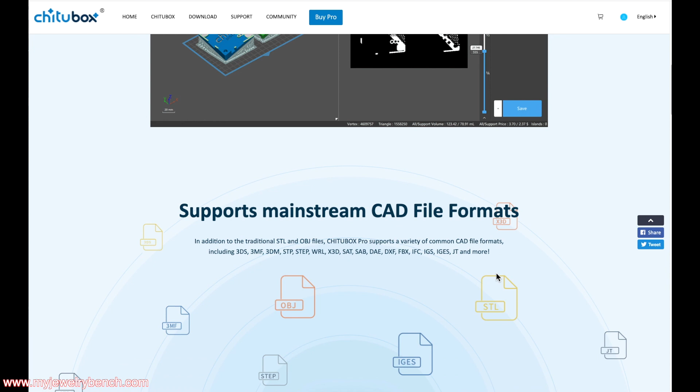I'm going to go over Chitubox Pro's features, not all of them, but most of them, and I'll talk a little bit about my thoughts and opinions. While they did offer this product to me for free, I want to give you my honest and best opinion of whether or not it is worth the $169 I believe at the current cost per year for a subscription.

I'm not a big fan of subscriptions, but some people like them because you always get the latest versions and it doesn't cost you a whole lot. I'm not going to do a comparison against Chitubox Basic or Free, but we'll do a little bit of comparing, because most of us, unless you've lived under a rock, if you have a resin 3D printer, you're probably using Chitubox Basic or Chitubox Free.

The current version of Chitubox Pro is available for Windows 10. It is not yet available for Macintosh or Linux. I believe the Macintosh version, from what I was told, is coming out closer towards the end of this month, which is really great because that's what I would work on. I happen to like modeling on a Macintosh better than a Windows PC, so if you're waiting for that, you don't have to wait very long.

Now I'm going to dive into the Chitubox Pro application and let you know my thoughts and show you around, and you can determine whether or not it's going to work for you. Let's get started.

When you first open the program, what you're going to see is this window here, and this is the main form screen of the Chitubox Pro application. What you'll notice is that it's now set up more like an Office Suite application, where you have tabs at the top with the corresponding functions just below those tabs. We have Start, Prepare, Support, Analyze and Measure, Settings, and Help.

Along the left side, you'll notice we have all the same buttons with the exception of Select, which has been added. But we can move our object, rotate it, scale, and mirror our object on the left, just like we did in the basic version.

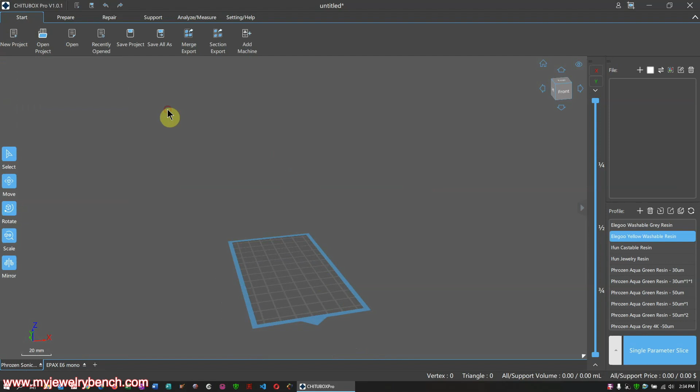You could save all as, so if you have multiple items on your build plate, you can go ahead and save all those. You can merge exports by combining all of those objects on your build plate into one 3D object. You have section export, so let's say you have 10 items but only 5 selected, you can export those. And then, of course, add machine.

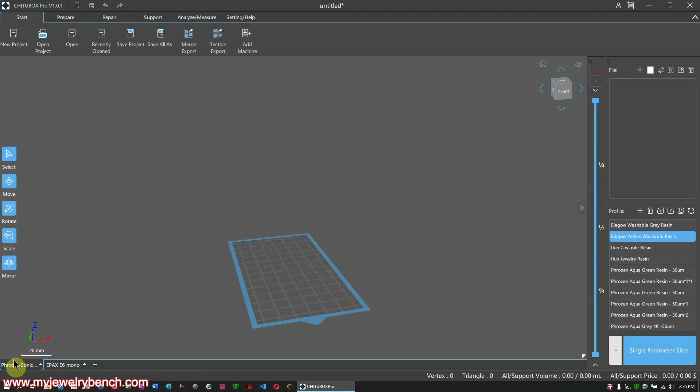There are 2 places to add a machine, here at the top and again at the bottom. So I'm going to go ahead and show you how to add a machine. Let me pause the video right here and just talk a little bit about adding your machine.

Some of the older versions of printers that we may have may not be compatible. I have a relatively newly upgraded printer, an Epax printer, that unfortunately is not compatible currently with Chitubox Pro. So I'm going to have to continue using the basic version until it is compatible at some point in time, or until they come up with a firmware update.

So before you decide to purchase Chitubox Pro, double check and make sure that the firmware of your printer is either compatible with the Chitubox Pro application, or that there is a firmware update for you to install on your printer.

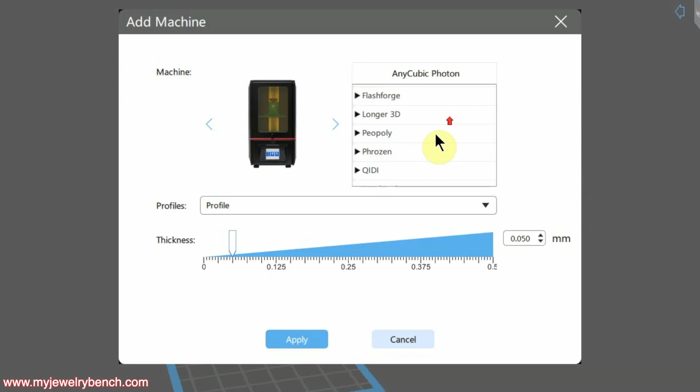Chitubox Pro does make it very easy to add in a printer. You just hit the Add Machine button and select the manufacturer. Not every printer here is compatible with Chitubox Pro, so just take note of that.

I have an Epax printer, an X1K 2K mono or monochrome, so I'm going to add that. We'll just select that printer there.

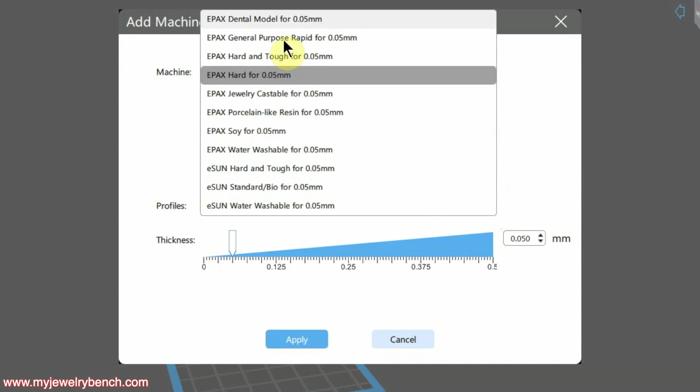We also have the standard size of the layer height we want, and we can also get a default resin that we want to use. So for instance, if you typically print in one kind of resin, you can make that your default resin. I'm going to select the general purpose resin here, and then we're going to move on to the thickness of the layer height, which you can see I can adjust next.

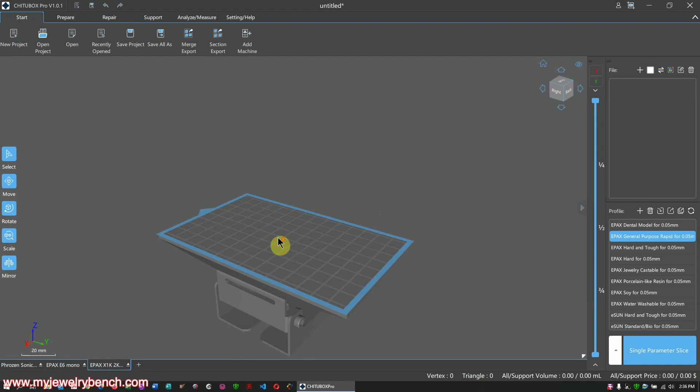One of the other things I like about Chitubox Pro is that all your printers, if you have multiple printers, are listed here at the bottom. Anytime I click on a specific printer, all the corresponding resins will show up here on the right-hand side. I can select whatever resin I want to print with, and as long as I've made my adjustments, when I go to slice my model, I don't have to open up a new window tab and go ahead from there.

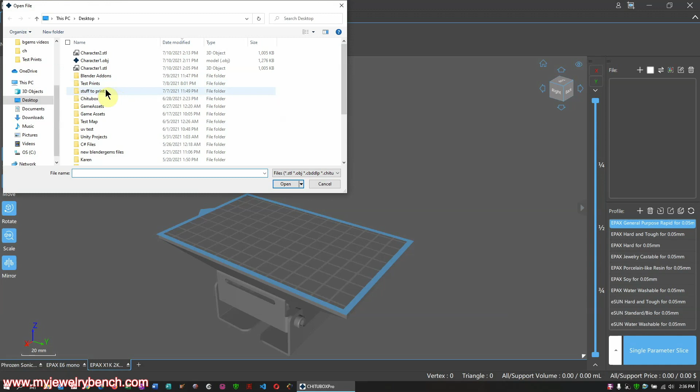I'm just going to import a model here, and when you import a model, if there's anything Chitubox finds that it thinks is wrong with it, it's going to bring up this dialog box telling you that it needs to be repaired. You have the option of pressing yes to automatically repair it or cancel to cancel the repair and then go on to the modeling or the 3D printing setup.

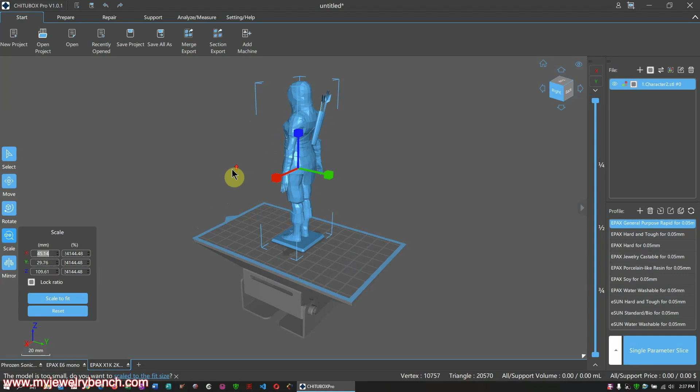Here you can see I brought in my model. I've scaled it up a little bit because this came in a little bit small. I was trying to do a low poly model here just to see how I would go about doing the support systems for this, so I'm going to just tweak the settings here for the scale.

Just like you did in Chitubox Basic, you have the constraints for the print size of your particular printer. So if your model scale is too large for your printer, you will see the parts that won't get printed or that are off the build plate and build size show up as red, and anything that can be printed will show up as blue.

You can go ahead and change these, and I'll cover the color settings under the settings tab later. For the most part, the tabs at the top of Chitubox Pro are set up in kind of an order that you'd be using them.

Start, prepare, repair, support, things like that. Now, the repair, I would probably put that second, because if you're going to have a model problem, you're going to want to do that first.

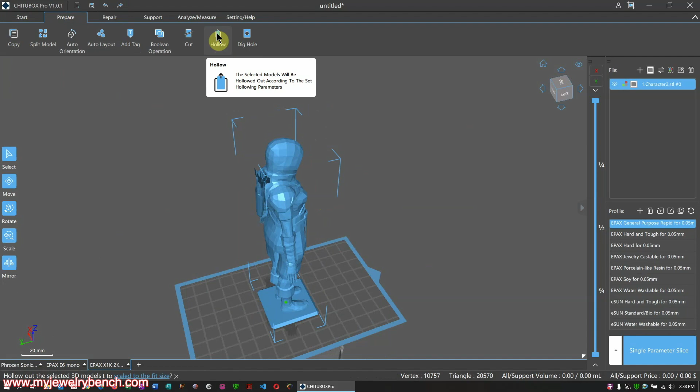But in this case, I went over to the prepare tab, and we're going to bring up the hollow option. You can see that the hollow option has a little more detail, a few more controls than we had from the basic version. This allows us to make a few more changes, although very similar to what we had before.

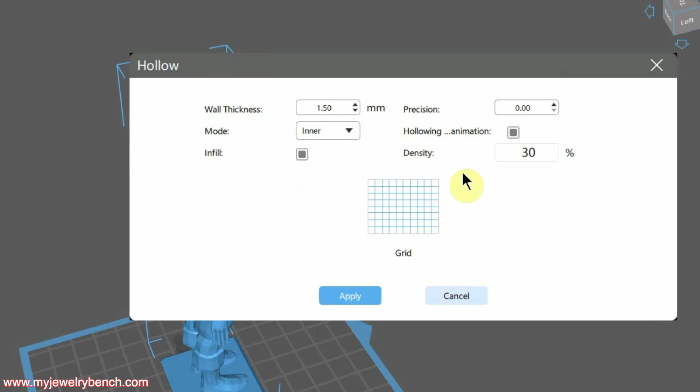We can adjust our size of the wall thickness for hollowing, whether or not we want to watch the animation, which sometimes is cool but not necessary. If we want to do infill, the support or how we want our infill to look, the density as a percentage of printing, and then we can apply that or cancel and move on to the next step.

So if we want to hollow it out, we just hit that hollow button and it'll run through its animation and hollow the model out for us.

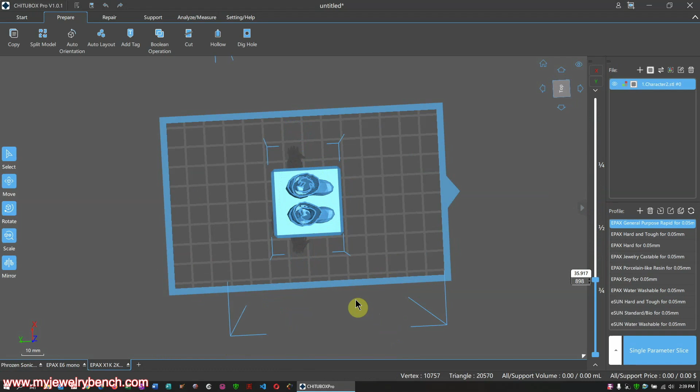Of course, once you've hollowed out your model, you're going to have to drill out a hole. So find the place where you want to put the hole for the resin to come out of, and make sure that hole is big enough. I don't think I made it very big when I made the hole for this particular model, and I probably wouldn't have put it in the top of the head if I was going to print this, but I went through and did it anyway just to do a test.

Again, Chitubox, when you dig out a hole into your model, will bring up a dialog box. So you just click that, and it'll bring up a dialog box to allow us to make adjustments.

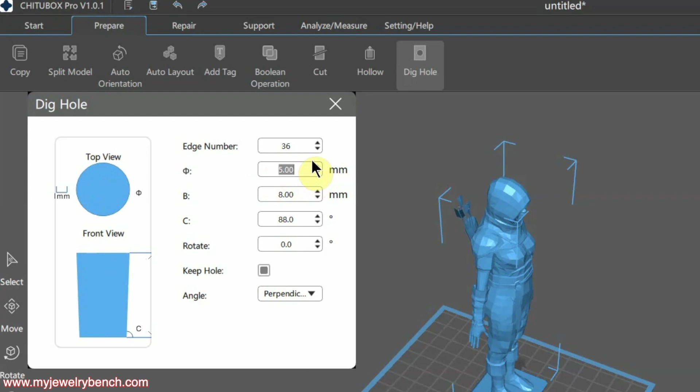Now, I really like the fact that everything is kind of graphical in Chitubox Pro, so that if you're new to 3D printing, or even if you just want to quickly look at things, you can see things at a glance and it gives you the corresponding reference. I can see the edge numbers, make my hole a little more detailed, and little indicators point to which settings I'm changing. There's no guesswork, you're seeing it here. As I make changes to the numbers, it makes the changes on the diagram to the left.

You can put your hole somewhere on your model, and it'll follow the surface of whatever area you're working on, which is really convenient. Once you find that place, you just click and it'll put the hole on your build plate, or the plug for that hole, and it'll hollow or put a little hole wherever you select it.

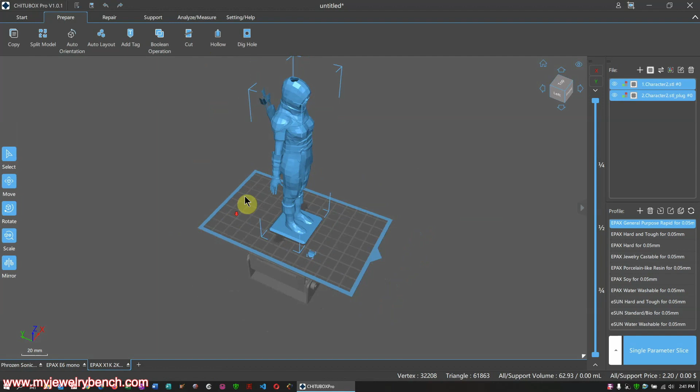Another really nice new thing in Chitubox Pro is the add tag option. Add tag is a convenient way for you to add either an indented text line or an extruded text line to any particular model that you want. You can put it anywhere you'd like, like in this case along the base. I could add it to my model. However, just keep in mind that unfortunately we have no control over the text once we add it.

It's only added parallel to the screen, it doesn't rotate around with your model. So if you wanted to orient it in a specific way, you actually have to rotate the model to get the text to show up in the correct orientation.

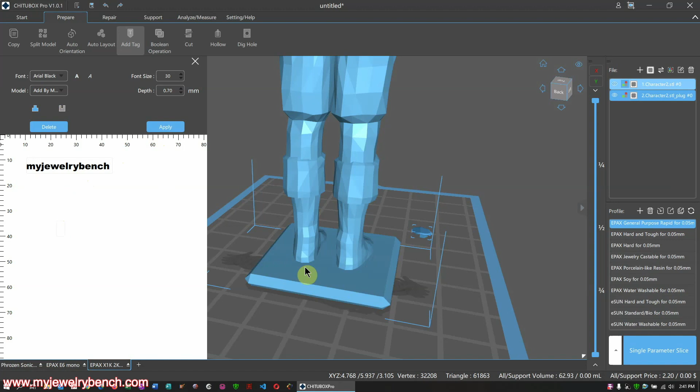It was a little cumbersome to get used to, but once you do that, you just type in the verbiage you want, add in the font you're going to use, the model you're going to be adding it to, the size of the font, and the depth of either the indentation or the extrusion.

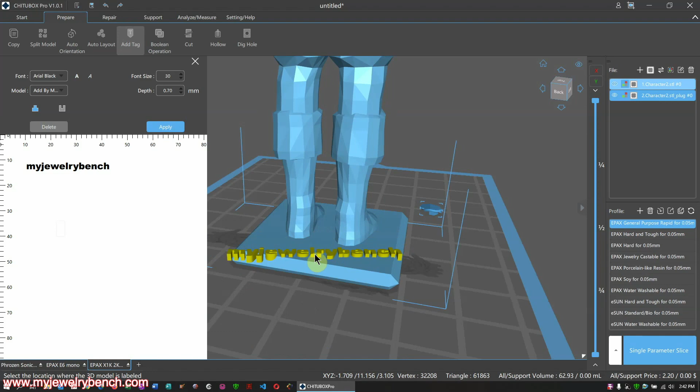Once that's done, hit apply and you can bring that over to your model. Again, if you look closely, it's oriented parallel to the screen and not the model. So if you wanted to rotate that, you actually have to rotate your model to fit the text. That's a little awkward, I'd like to see that change, but for now, that's pretty cool.

If you want to mark certain things like your website information or maybe a model number that you didn't do in design work, you could go ahead and edit here. Or let's say you're printing 5 copies of the same thing, and each of those are going to be for different purposes, or you want to serialize them, you can put little numbers on them to indicate which versions they're for.

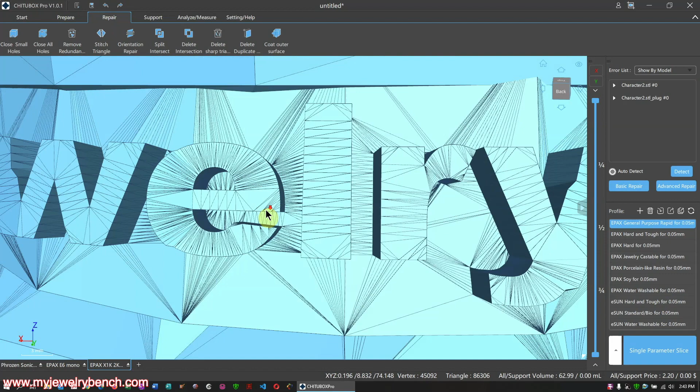So if you ever made a model and it had an error in it that you couldn't figure out when you brought it into Chitubox Basic, we now have a few more repair options built into Chitubox Pro. These are a little more detailed, a lot more mathematically exclusive to actually repairing the model.

For instance, we can close holes, we can close all holes, we can do stitching now, we can make changes to the orientation of each repair. We can delete duplicate faces and intersections.

That's all possible here. I think most of us would rather handle that in modeling, but you do have some of these features here, and the rudimentary repair options may help some of us fix models that we either download off the internet or that we just didn't see errors in when designing. So keep that in mind, play with those as you see fit.

I did have about a 60-40% success ratio on repairing models. In some cases, it kind of just messed up the orientation of the faces. In other cases, it worked really great. So it depends on whatever you're printing in your model.

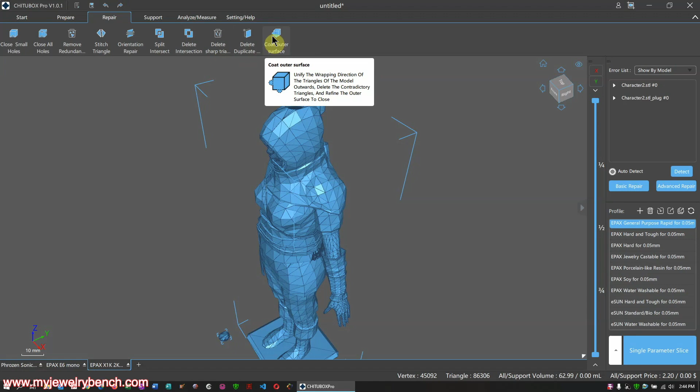Okay, the next step would be to move over to the support tab. Now, the support tab is for your structural lattice work support for 3D printing, not technical support, that's handled in a different area, we'll get to that. So when you click on that tab, it's going to analyze your model and bring up the settings for all your support. On the left, you can see we have some new options that we didn't have in Chitubox Basic.

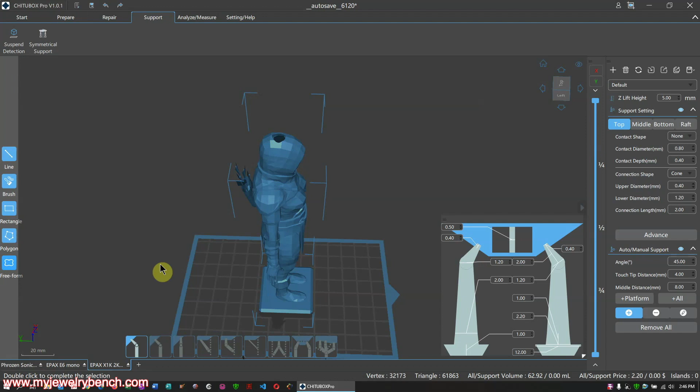On the right, you can see there's a bunch of settings we were used to a little bit with Chitubox Basic, but they've been expanded to cover other areas. On the left, you have little shapes that you can select and circle around your model, allowing you to add structural support to your printing. Or if you like to do custom support work and add your own supports individually, you have that option too, with a lot more flexibility.

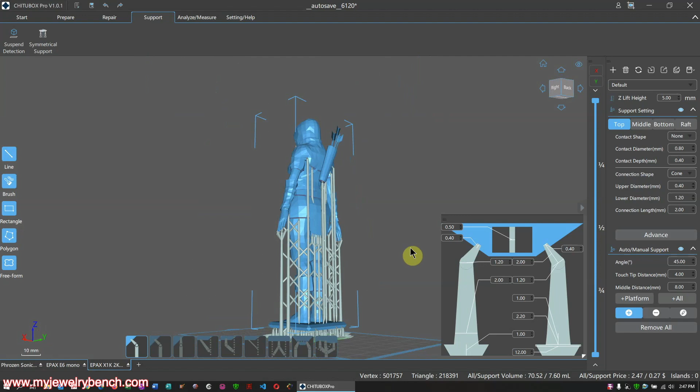Kudos to the development team at Chitubox—let me pause here and talk about a few things. Let's take a quick look at the options at the bottom of the screen. There are 9 options that give us different versions of supports that we can use. I think that's fantastic.

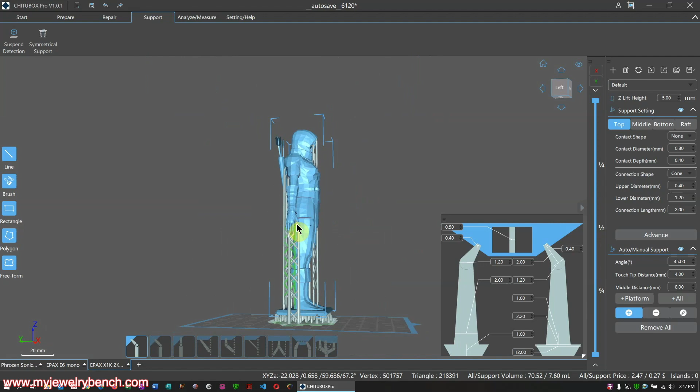If you want to change the way you connect your support materials to and from support structures or lattice work directly onto your model, this gives you default angles to play with, and I think that's fantastic. With this version, I started using the one on the right, which is a tree structure for jewelry printing. If you're doing a lot of 3D printed jewelry or smaller models, that came in handy, and I fell in love with that option.

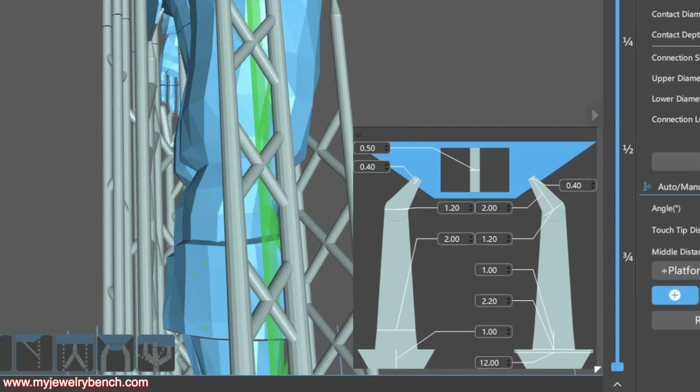The other thing I love about the support setup page is this new window on the right side of the viewport, which gives us the option to adjust any of the particular sizes on our model and how these support structures—the size and depth of the supports—go into and exit our model.

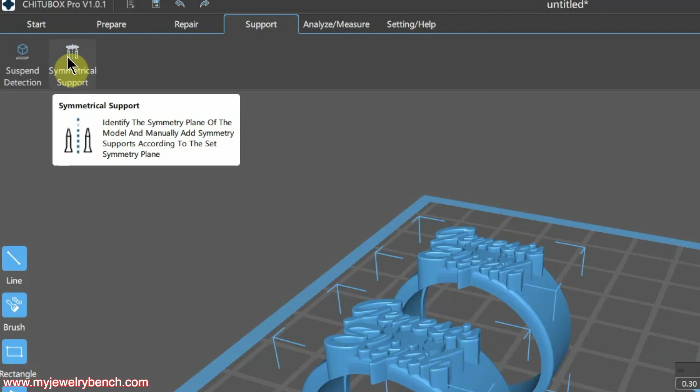I'm also going to jump to another thing I found absolutely fantastic: the ability to symmetrize the supports. If you click this button, you can symmetrize your supports. It brings up a little window asking where you want to symmetrize it along the x-axis.

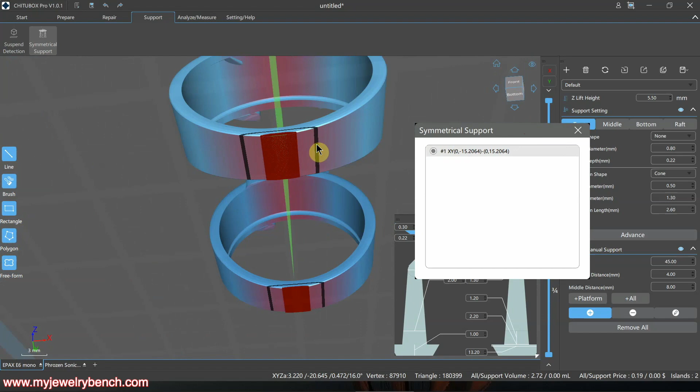What's really fantastic is that when you add your supports, it adds them to both sides of your model. One thing I hated about manually adding supports in Chitubox Basic was trying to get my supports in the same location on either side. Here you can see I had a little issue because the depth of the model was too low, but if I add my supports on one side, it duplicates them on the other. I think that's just fantastic—thank you, Chitubox, for adding that.

Here's another kudo for Chitubox. I think it's important that we have a graphical user interface for our support settings, sizes, and structure. That's something a lot of people don't understand—it takes a lot of work to do this from a software development standpoint, but doing it makes it much easier for the user to want to use your software.

Here you can see this beautiful display showing how deep our model supports are going to break into our model, how wide they may contact, the thickness of each support, and the size of the rafts we're going to use. You can make changes to each and every step of your model.

For instance, if we look here, we can adjust the contact, and you can see I'm spreading that contact out. By making that bigger, in the jewelry industry for example, we could actually make a sprue out of that to get to an area where we possibly couldn't add one for casting.

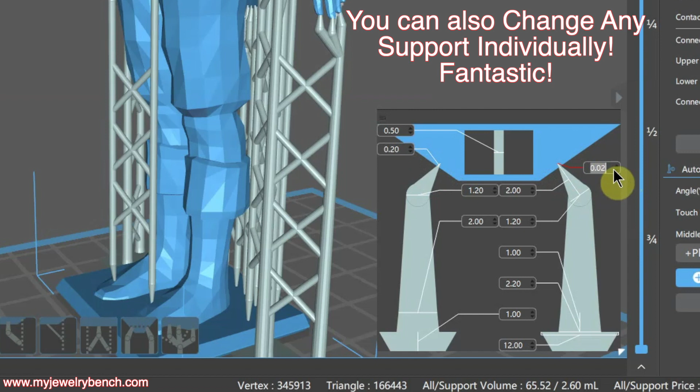It's really nice—we have very fine control. We can go down to 0.02 millimeters, but that's too little. It might be good if you're using a tree structure on a 3D styled character model, maybe just trying to get a finger support there. But for the most part, you're going to stick around 0.2 to 0.3 millimeters in size, and you can adjust your depth according to your model. This is a fantastic tool to use if you really want to customize your model supports.

To be honest, this is where I spent most of my time working with Chitubox Pro. I really enjoyed this part of the software because, like I said, I do a lot of jewelry design, and I have to make a lot of custom supports. I can't rely on just generic settings to add supports to my model, as it may corrupt the model or damage the 3D printed model when I try to remove those supports before I can go into casting. These are things you need to be aware of when working with Chitubox or any slicer, but I think Chitubox Pro is making this a whole lot easier.

Just because I was really impressed, I'm going to cover a little bit more about these. We have these 9 settings for our support structures, and this allows you to build how you'd like your lattice work to show up. I think this itself was just a godsend to add. This helps people who do character models, prototypes, or in my case jewelry, or anything you want 3D printed. This is going to help a lot.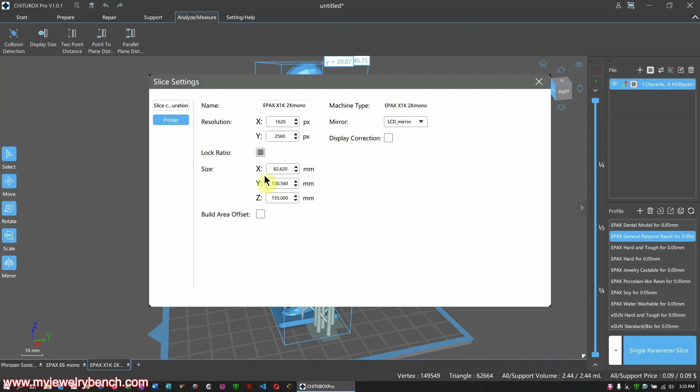We can also go take a look at the next setting, the default slicer settings. Here you can see what we used to have on our setup or settings tab. Now we have resin, print, G-code, and advanced. These are very similar to what we used to have in Chitubox Pro, or what we still have in Chitubox Basic. We still have those in the basic version, but we have a few more options here under the print settings, and you can go in and really make changes to each of your resins based on the specific printing you're doing.

All of these settings are probably a little overwhelming for most people, but it's always a good idea to have a basic understanding of at least the first column, which is your layer height, your bottom layer count, the exposure time, the bottom layer exposure time, and so on. I often suggest people set the light delay or light-off delay for at least 1 or 2 seconds, just because that helps keep your display from overheating.

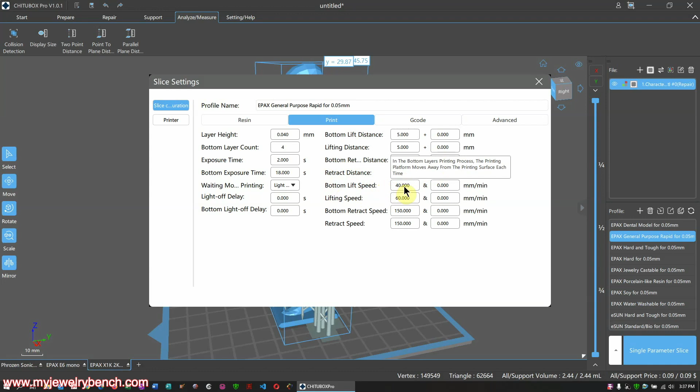Of course, if you're upgrading from Chitubox Basic or the Chitubox Free version and you're going to buy the Pro version subscription, you can import all of the resin settings into your current printer settings. So for instance, if I go to Chitubox Basic, I can export all my resin files that I've created and modified for the resins I use, and import them into Chitubox Pro, specifically for the printer I have set up in the tab.

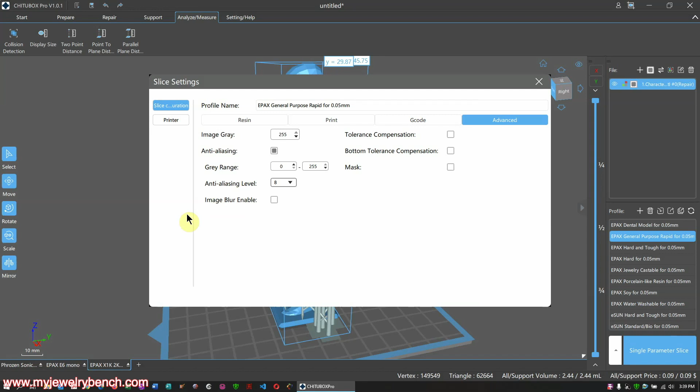You'll also notice that we do have grayscaling still, but we have a little more specific detail to grayscaling. We can actually go ahead and adjust the levels from 0 to 255. Those 256 settings might be a little complicated for a lot of people, and if you just leave the basic anti-aliasing levels and grayscale levels to default, you'll probably do okay. On all of my example prints, they worked really, really well, and I was happy with the printing.

It took me a little while to tweak in the resin settings again. For some reason they didn't come out quite the same, and there must be a little bit different code in the slicing software. But I did notice that most of my prints, when I got them tweaked, were absolutely perfect.

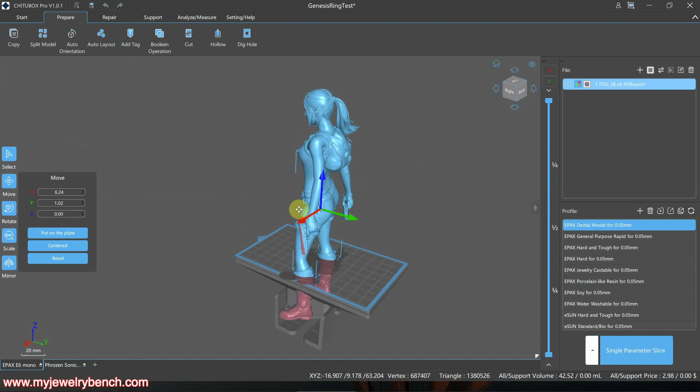There's one more thing I'd like to cover. We do have much better detection for detecting islands in Chitubox, and it gives you the ability to go back, and while you're doing the support structures in your support settings tab, you can actually have Chitubox look for any missing islands that you didn't get, which is really good. We have a lot more control over our model placement, and we can go through and make many more tweaks than we could in Chitubox Basic.

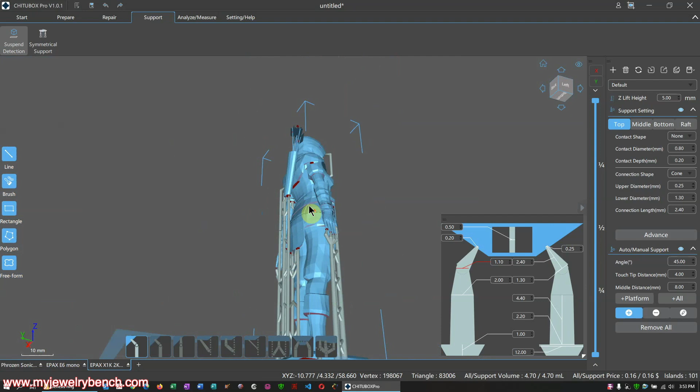I think if you look at Chitubox Pro compared to Basic, Basic just gives you the ability to make minor changes to your support structures, where Chitubox Pro actually allows you to do some basic modeling, as well as many more ways to find out where your print might fail, by giving you access to island locations, better support structures and support ladder structure, and the ability to tweak all the settings before sending a file to the printer.

For example, on this particular model, where I've marked all my islands for support, you can see anything in red is a place that I probably either have an error in printing or probably should add some kind of support to. That's very convenient, especially for larger models that you can't really find issues on otherwise. I can go ahead and add support to those areas as necessary.

This particular model I'm not going to print, but I just wanted to play with it because it gives us a lot of detail. This was more of a 3D character for a game model I'm working on.

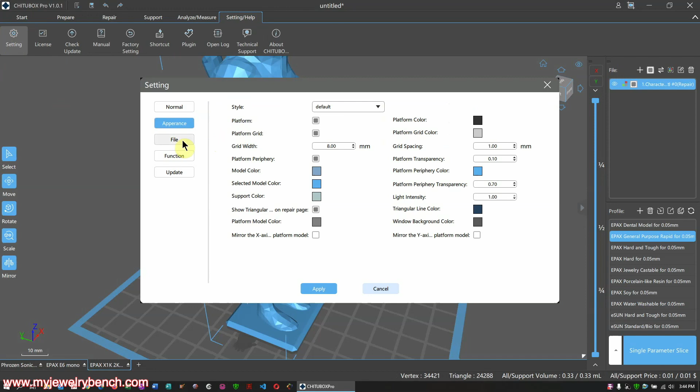So I don't want to ramble on too much, but we're going to cover a little bit of the settings tab here. You can change pretty much all of the default functions of Chitubox Pro. You also have access to your license key, you can check for updates, the manual, factory settings reset, and create keyboard shortcuts for your version of Chitubox Pro. You can also add in a plugin when available — currently the only plugin available is one for the Anycubic Photon Mono printer. You can also access technical support, and of course the splash screen here.

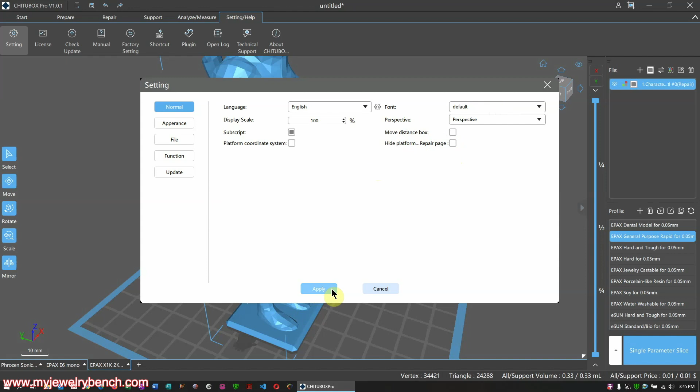So you have control over the color and appearance of Chitubox here. You can change all your default settings to make it work a little bit better for you, and again the keyboard shortcuts, you could change to whatever you find convenient.

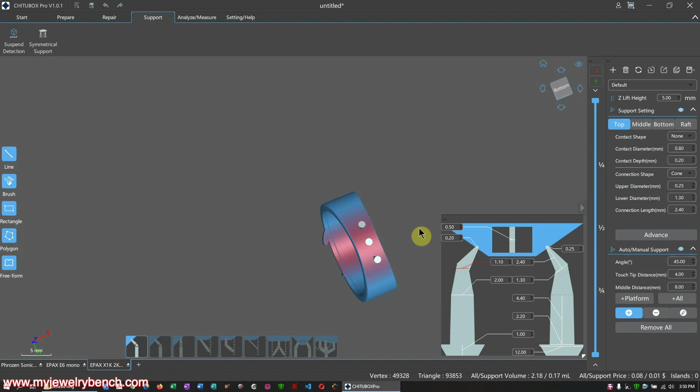I think one of the things I found a little bit annoying with Chitubox Pro was that it kept crashing on me, and I suppose maybe had I changed the default settings for the graphics card I might have been a little bit better off. But I did not do that until later on during my recording of this. I did find that some of the settings and options in Chitubox Pro seem to be left over from development time that maybe a lot of users don't need access to, but the more the better, because some people do like that.

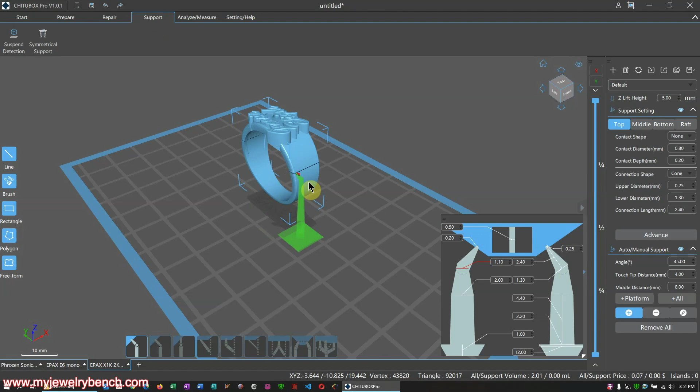I think that's one good thing. I'm not particularly fond of subscription software, and while I think Chitubox Pro is a really excellent program to use, I think you have to really find a way to justify $170 per year to afford software like this. I think it's probably worth it for most people who have multiple printing needs, maybe 10 or 12 printers, and they're doing a 3D printing business. I think for the guy who's a hobbyist at home, just tweaking models and doing design work on his own, this might be a little overkill. Those are my personal feelings.

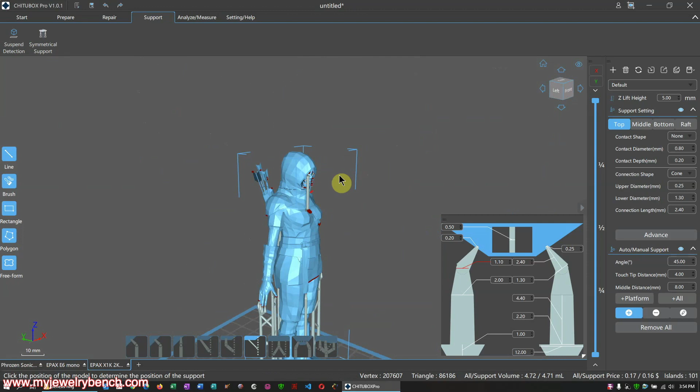Again, Chitubox is a great application, the basic version. I love the Pro version. I think it's just full of great things that we in the industry need, and for me, the support functions built into Chitubox Pro are fantastic. For that, I think it's just worth it. But again, you have to justify it. If you're doing this more as a hobby, this might not be the version you'd want to upgrade to. But if you're doing 3D printing professionally, or in my case, I do a lot of jewelry design work in 3D printing, it's well worth it.

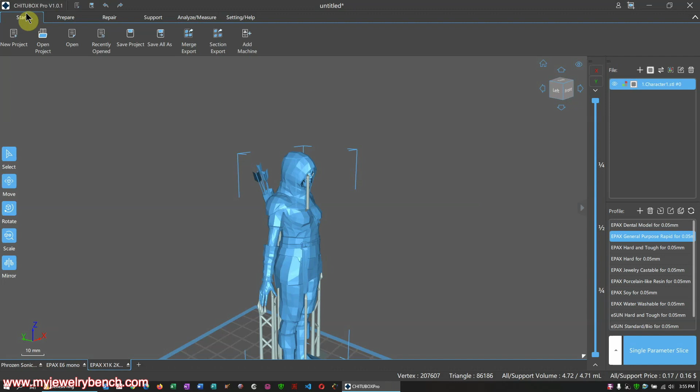If you're interested in getting more details, there's a lot of versions, there's a lot of reviews on YouTube about Chitubox Pro. I'm just giving you my honest opinion. I think it's a really good program for people who use it professionally. I think if you're just a hobbyist, it's probably a little overkill. Take care and have a great day.